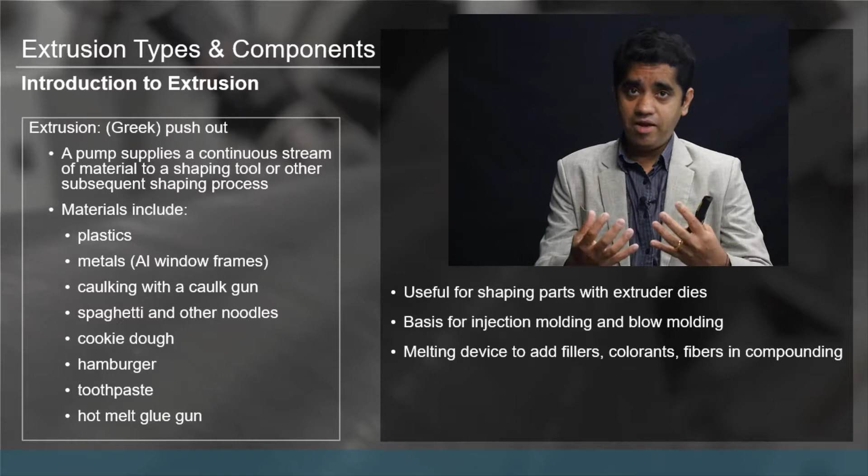So now you're going to see a video which shows you the different components of the extrusion, as well as how the material gets into the molten state, how it's actually mixed, and then how it comes out of the die orifice to get into a shape, and how we cool it to further take the product out of it.

As you have seen in the video, the principle is very simple. Continuously shaping a fluid polymer or molten polymer through an orifice, called a die, and then solidifying that into a product.

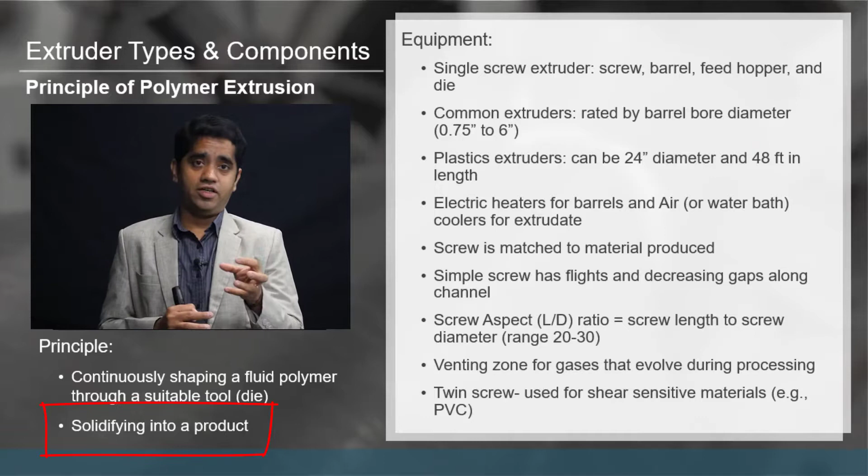The solidification process can be done using multiple different ways. What you have seen in the video is more a water bath system. That's basically a polymeric strand that's cooled to make it into pellets, which is what I was talking about previously, from powder to the pellet form.

But this product can be made using multiple different dies to make multiple different products, and we'll see some examples of that today.

Coming to the equipment that we use, primarily this extrusion process is of two types: single screw extrusion and twin screw extrusion, and we'll talk about both the process physics momentarily.

In general, if you take the extruder as such, it has one screw or two screws depending upon which process you select, and it has a barrel, a feed hopper, and a die. These are the prime components of it, and then we'll dissect into each of these in a few minutes.

And then it does have electric heaters that heat the material to get it into a molten state. But that's not all that melts the material. There's something else that's going on, and I'll talk about that as well.

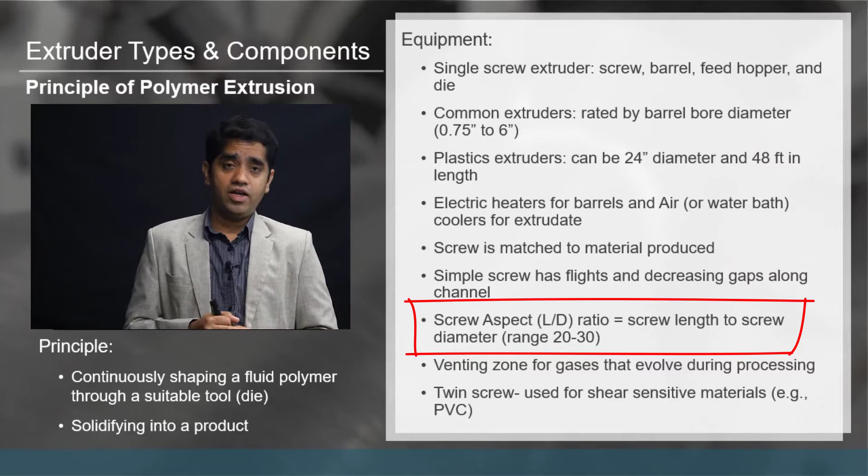Typically we rate these extruders with the diameter of the screw, and we also rate this what we call L by D, or aspect ratio. Typical L by D's range anywhere between 20 to 30, meaning the ratio of length to diameter. So we have a typical diameter which may be 22 millimeters, 24 millimeters, 26 millimeters of the screw.

Again, these are all lab scale I'm talking about. If you go for industrial scale, they are much larger, 48, 96 — pretty huge because the throughput has to be much bigger for industrial scale. And then if that is the diameter, the length can be in feet, so the aspect ratios are pretty large.

Of course, higher the aspect ratios, you'll have more heating zones. But we can categorize all those heating zones into three main zones: feed, transition, and metering. We'll talk about the reasoning of naming these things and what's the function of each and every zone, and how it's going to impact the overall process physics.

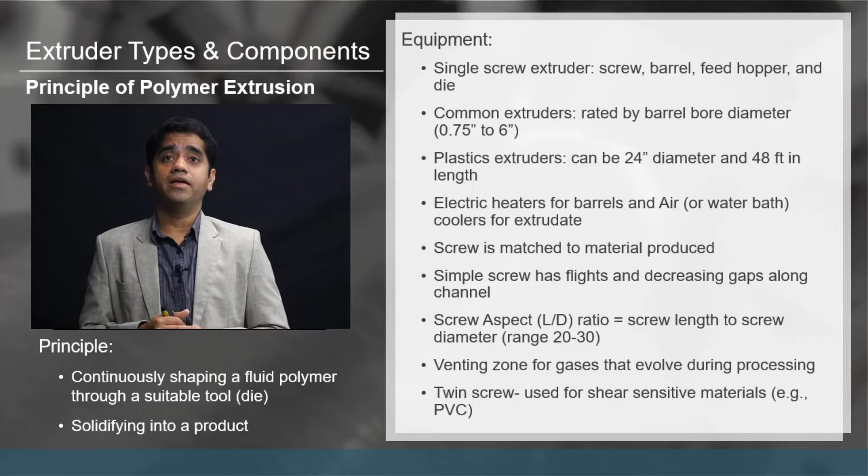Some additional components within the extrusion system, some of which you may see, some of which you may not see.

For example, the drive system. You may not see all of these components individually when you actually go to an extruder, as you have seen even in the video. The motor, the gearbox, the bull gear, and the thrust bearing, all these things are embedded within the drive system.

But the feed system is something you see when you walk through towards an extrusion system. The feed hopper, that's what you have seen in the video as well, and the feed throat, that's where the material gets fed into, and we'll talk about how the material gets into the molten state. And then the screw feed section, and then the screw barrel and the heater systems is something you can visibly see on the machine. And the head and die assembly, that's also as you've seen in the video itself.

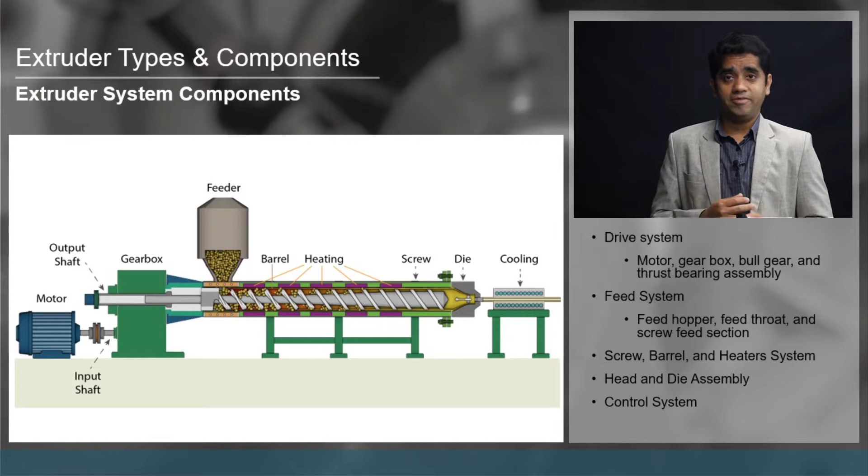The control system is basically the heart of the machine, using which you control the temperatures, the pressures, and everything that's out there. The extruder feeders are of primarily two types, volumetric as well as gravimetric. The one which you have seen in the video is a gravimetric feeder.

But what's the prime difference between these two? A volumetric feeder feeds the material based on volume basis. So it doesn't care about the density of the material. You may have two different materials with different densities, and the densities could be varying by a significant amount. I'm just giving an example here - maybe one has 1 gram per cc, the other has 2 grams per cc. But it doesn't matter what the density is. All that it weighs and controls is the volume, and it just feeds the material from the hopper to the feed section on a volumetric basis, on a volume basis.

On the other hand, the gravimetric feeders do feed the material from the hopper to the barrel on weight basis. Which means that if you have different materials, it exactly weighs the material based on the density and accordingly feeds that into the barrel.

So there's no surprise or question of which one is better, right? Because the answer is very evident. The gravimetric feeders are more accurate and most preferred in an industrial setting. The prime reason being is it measures the weight and then accordingly feeds.

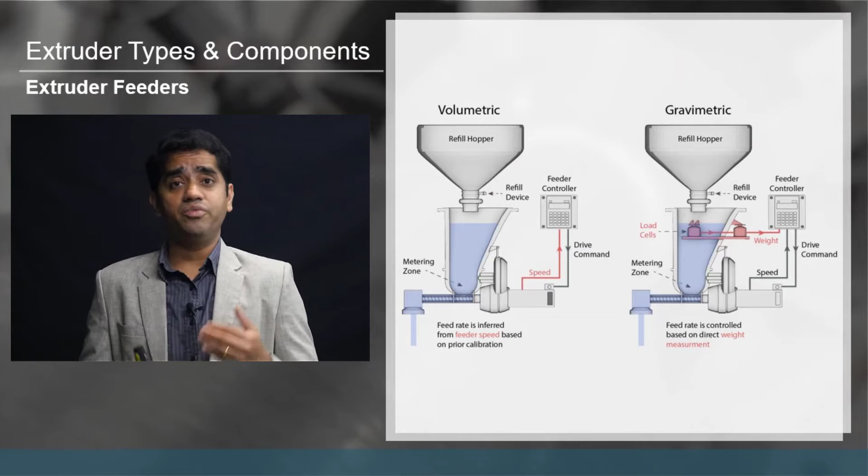This is especially useful when you're making short fiber composites or compounding using a twin screw system, because the materials that you want to blend or compound or make composites out of may have different densities. But if you would like to have a specific proportion, like 30% of one material, 70% of another material based on the weight basis, then that's exactly how the gravimetric feeder will measure and make the assessment and provide the material into the barrel. But on the other hand, volumetric doesn't care about any of the density, so it may not give you the exact weight ratios that you're looking for in the eventual product.

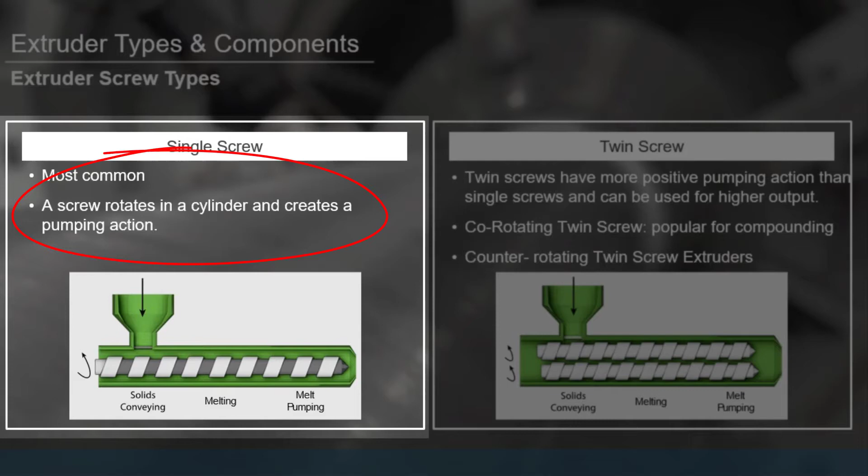As I said, the extruders are of two types. The most common one is the single screw extruder, but the twin screw is also pretty widely used. In a single screw, a screw rotates in a cylinder and creates a pumping action. A single screw is used for a lot of different applications, but it's primarily used for making pellets, especially coming out of a chemical plant.

You get a powder form, and then you have to transform that into a pellet form. So taking it from powder into pellet form, and that pellet form is subsequently used, whether it's in injection molding or even thermoforming or blow molding, whatever other eventual plastics processing technologies there are - you use these pellets especially because of their ability to flow freely. So single screw is primarily used for those, and there are so many other applications as well, but that's one of the most dominant applications, and it's very widely used, most commonly used.

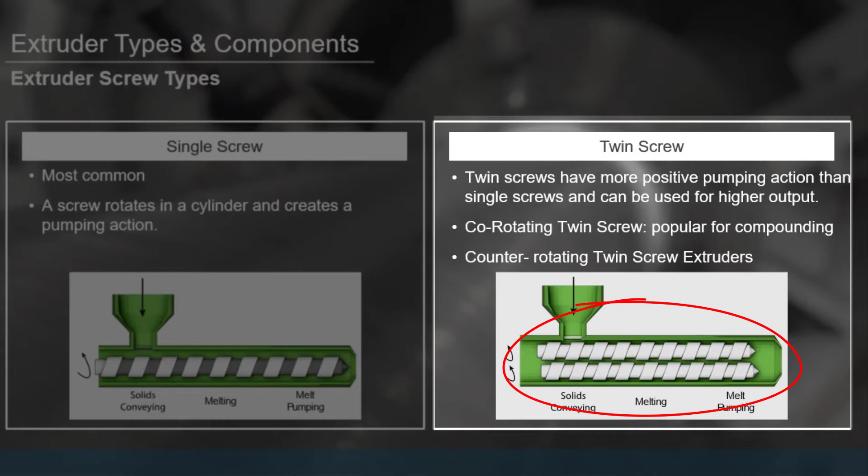On the other hand, in a twin screw extrusion system, as the picture depicts, you can see two screws in there. The prime reason for that is because twin screws are used for compounding. So you have these two screws that enable good mixing of the materials, which you can use both for blending or compounding, as well as making composites. And then the twin screw can be of two types, co-rotating as well as counter-rotating.

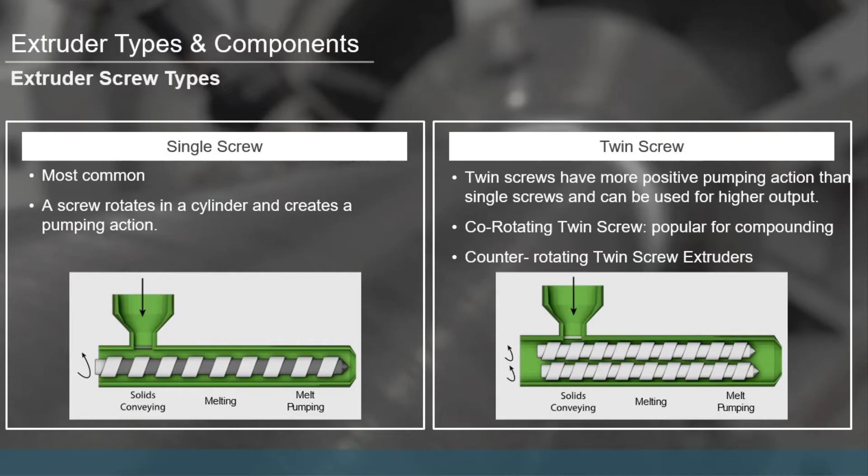Co-rotating is most popular for compounding purposes, while counter-rotating is also used but creates very high shear. It's not used for temperature sensitive materials because it escalates the temperature very fast. So if you have a high molecular weight system, which is difficult to compound, or that can withstand high shear capability or even high temperatures, that's where counter-rotating is used.

The extrusion system, the whole barrel you're seeing in the picture, that's called the barrel, and that's the heart of the machine. As you've seen in the video, the material gets fed into the barrel, goes through multiple transitions within it, and finally comes out of the die to get it into a shape, and then you eventually cool it down to get the product.

This barrel, the prime heart of the machine, is divided into three different zones. The barrel is what we're talking about with the L by D, the length over the diameter. The barrel consists of the screw or screws, and the diameter of the screw is measured in 28, 30, or in industrial scale 48, 96 up to 150 millimeters or even more, with a significant length. So the L over D is basically the aspect ratio we are talking about.

Depending upon the aspect ratio, the larger aspect ratio, you may have more heating zones, so you may have multiple heating zones. However, we can separate this entire system into three main principal zones: the feed section or feed zone, the transition section or transition zone, and the metering section or metering zone.

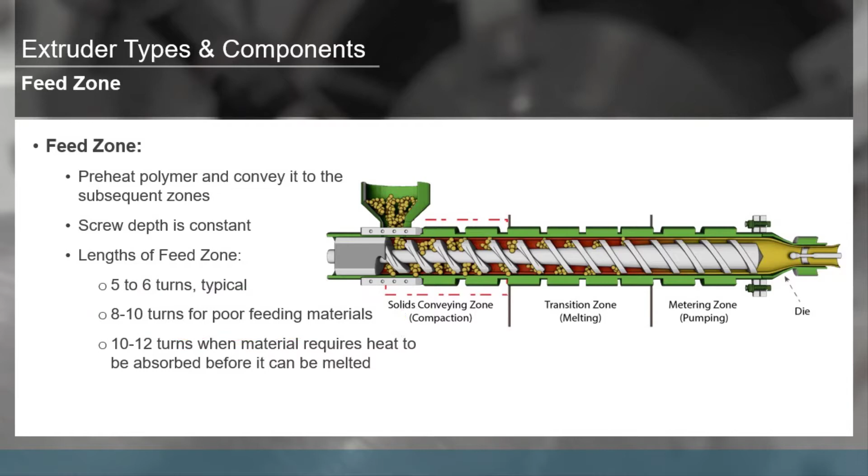So you are completely ensuring that the material does not melt in the feed zone. The length of the feed zone is typically 5 to 6 turns, but it may go up to 8 to 10 for poor feeding materials, or 10 to 12 when materials require heat to absorb before they can be melted.

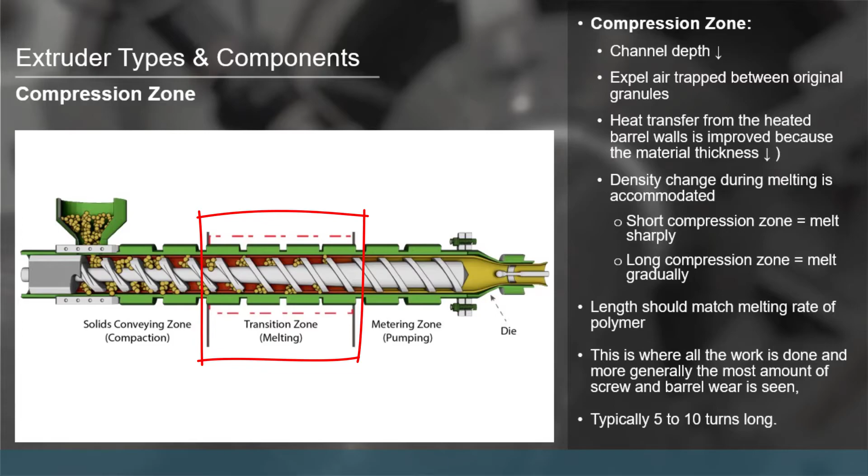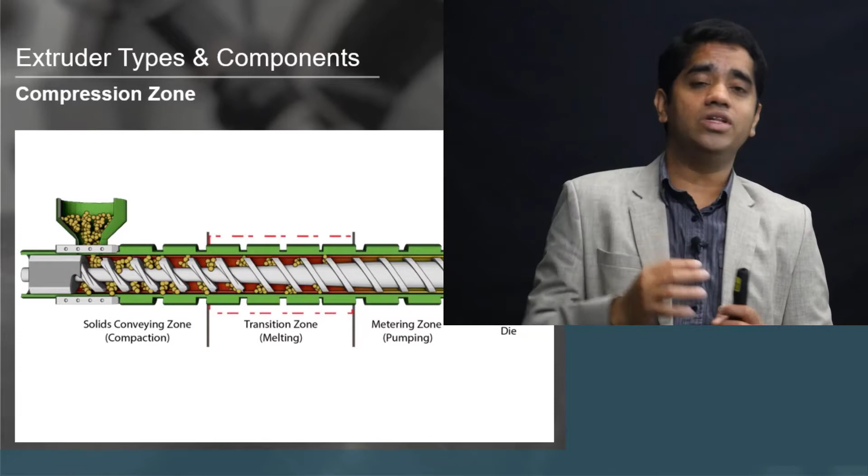The compression or transition zone is the most important zone in the entire extrusion barrel system, primarily because this is where you want to ensure the material completely melts. In the previous zone, you don't want the material to melt, but here you do. The solids from previous zones get conveyed to the transition zone, and here you're trying to melt the material.

The channel depth is decreasing, as you can observe in the picture, and there's a strategic reason for that. By decreasing the channel depth, you increase the shear rate and induce shear-induced heat. That heat, in addition to the external heat provided through the heat bands around the barrel, melts the material. So in this zone, you're actually escalating even the external heating elements.

In the feed section, if the melting or processing temperature is 200, you're subjecting the material to 160 or 170 degrees. Let's say 170. Here, in the transition zone, you set it up to almost 185 or so. So still 15 degrees apart from the actual melting temperature, but the shear heating is so high that you can sometimes even set this up to 190, and the shear heating almost escalates it further.

You want to be careful because you cannot measure the shear heating directly. What you measure on the control system is only the temperature you set on the heating bands, but the shear heating further escalates the actual temperature. If you have a temperature-sensitive material, think about it: the externally applied temperature plus the shear heating will escalate the temperature by a big ramp.

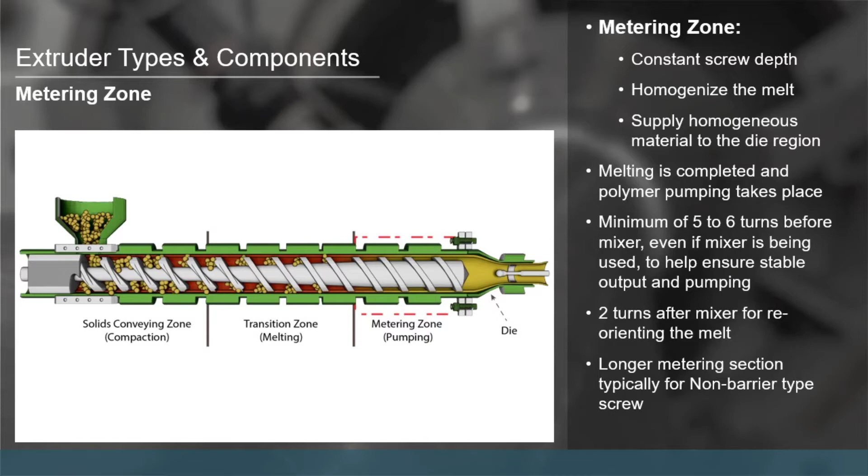That's the whole intent. In this metering zone, you want to maintain whatever molten material comes from the transition zone, so you set the external temperature to the melting temperature range, which is basically 200 in our example. You want to maintain this because the material has already experienced the melt profile in the transition zone, and then pump it out towards the die to make it into product and subsequently cool it.

Coming to the die zone, this is where the molten material coming out of the metering zone is pushed or pumped out of the system to make it into a product shape and then subsequently cooled to get the product out. The two prime components here are, first, the breaker plate, and then the screen pack.

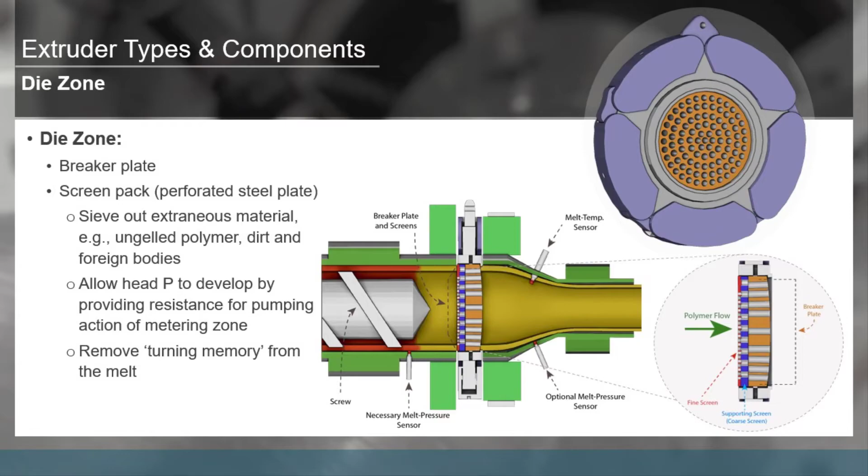The screen pack is primarily made out of a perforated steel plate. It sieves out extraneous material, such as any ungelled polymer, dirt, or foreign bodies. It also helps remove turning memory from the melt, and allows head pressure to be developed by providing resistance for the pumping action of the metering zone. That way you have a high pressure zone and a low pressure zone outside, so there's a transition of material from high pressure to low pressure.

But there is also a problem when you are making composites - the screen pack can increase the pressure to such a high extent because of clogging with the fibers that it may actually stop the overall action of the system. So you have to be careful when processing composites or high viscous materials. That's when you have to take extra care in terms of the screen pack design, or you may have to sometimes even remove the screen pack to make sure the material flows through smoothly out of the die and then subsequently into the product phase.

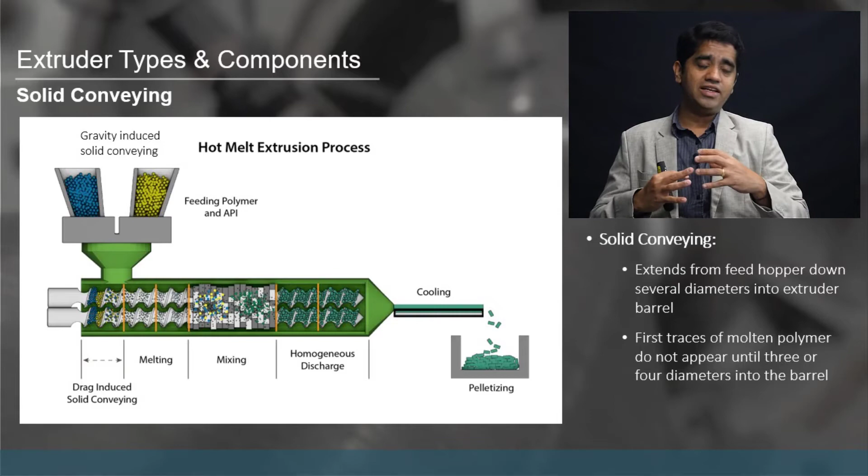Now let's look at solid conveying. So basically we talked about the transition zone where the material gets into the molten state. From the feed zone, the solids are being conveyed and then get into the transition zone, and here the material starts to melt. Solids conveying is all about conveying the solids from the feed zone towards the transition zone, and within the transition zone, how the material molten phase occurs.

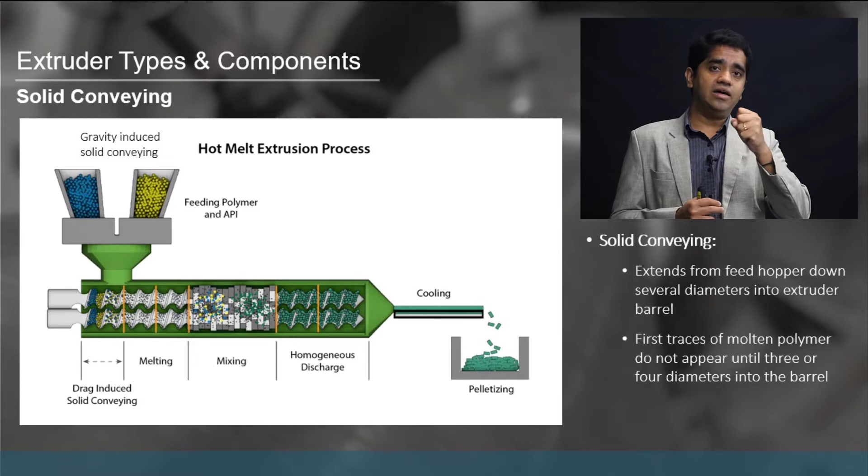We can explain this using the plasticizing Tadmor model. As you can see in the picture, there is a rotary action around the system, and those are the two flight channels, between which you have the material. There are solid beds which just came out of the feed zone, and they keep on rotating, and form a thin layer of molten film. This is due to the external temperatures that you have set, let's say 180 or 185, and that thin layer gets into the solid bed again, and then the rotation continues to happen.

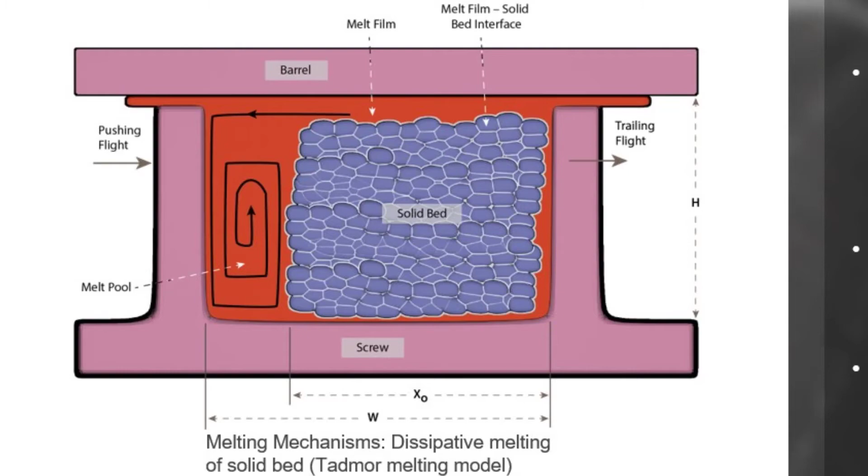When more and more material from the solid bed gets melted, it goes towards the melt pool, and that's how the melt pool develops, and subsequently you have a complete molten material which is then pumped into the metering zone. This is nicely explained by the plasticizing Tadmor model, and this is a phenomena that actually happens within the barrel of the extruder between the two channel depths that you can see over here.

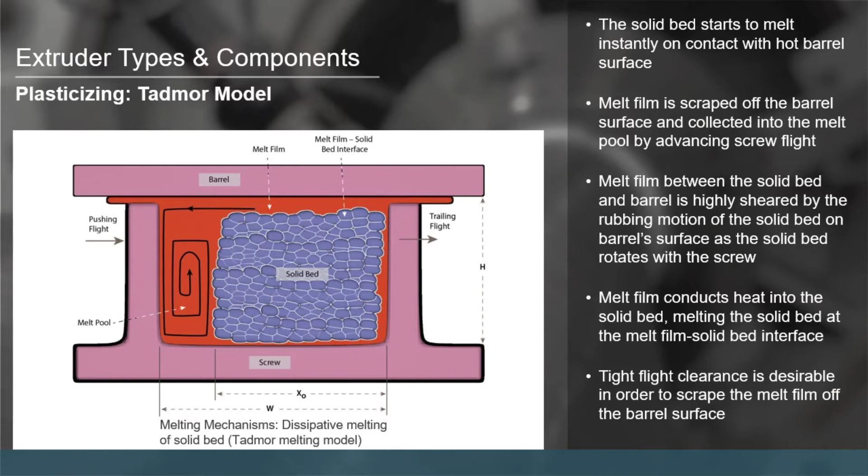Some of the preferred conditions for a high dissipative melt capacity of a screw at a given screw speed could be high barrel temperature or smaller channel widths. That also could help in expediting this whole system, and very tight flight clearances, because all of these will increase the shear heating that eventually will help to melt the solid beds more profoundly and much faster, so that the melt pool can be generated at a faster rate.

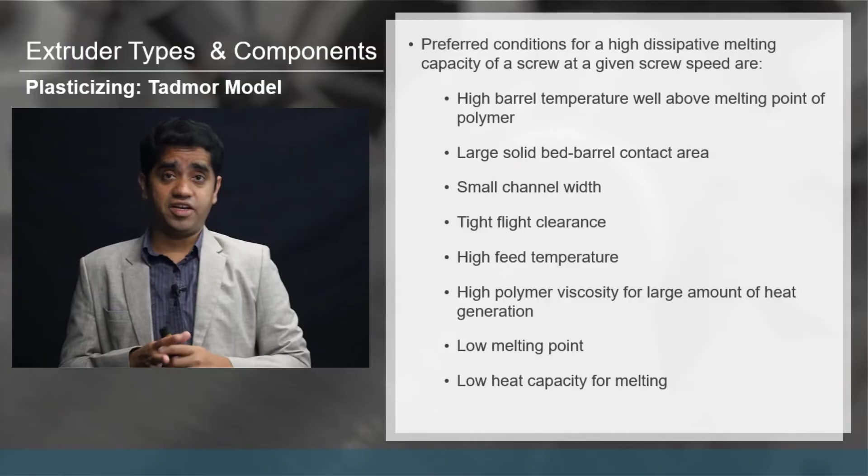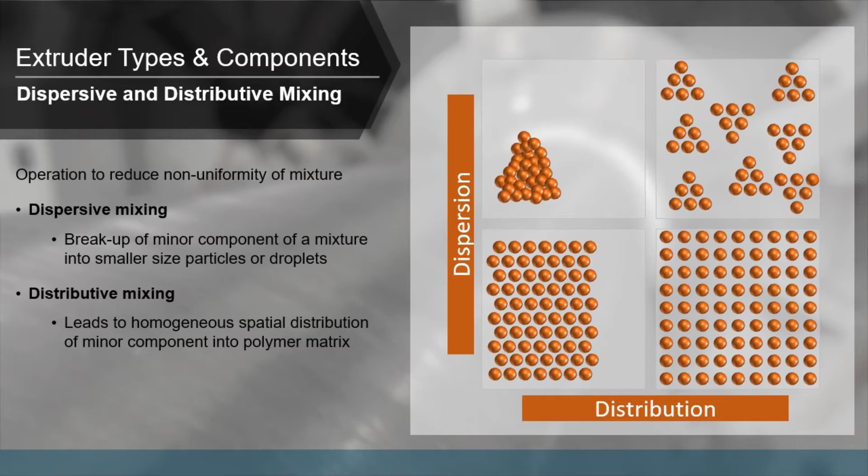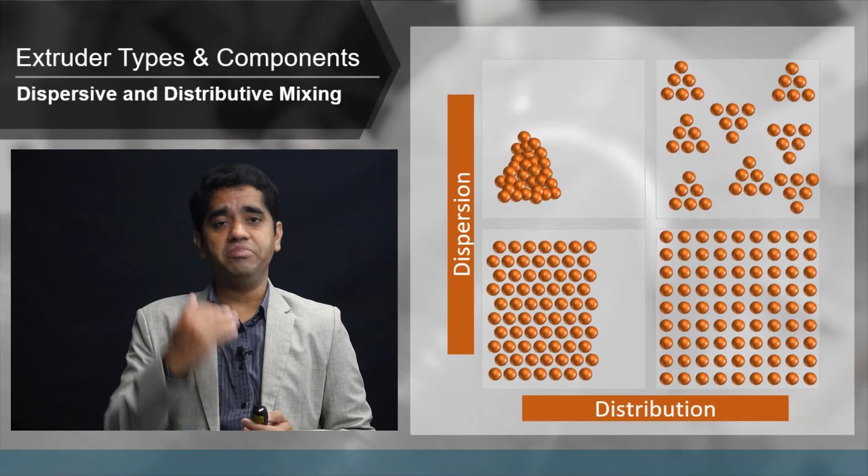In terms of distributive mixing, you can have the same clustered agglomerate particles, and then you can have a lot of them in small bunches, or you can also have a dispersive mixing done, and then those get distributed. There are some kind of mixing elements that also facilitate distributive mixing. Ideally, what you want is both dispersive mixing as well as distributive mixing. If you look at the four quadrants shown, the last quadrant is basically what we are talking about, on the right hand side, which is dispersive mixing as well as distributive mixing. Ideally, that is the type of mixing you want. So your screw design should be a combination of these two, so that you can realize the eventual dispersive plus distributive mixing in your final material, and that will help you get the best property material system, which eventually makes it into a product.

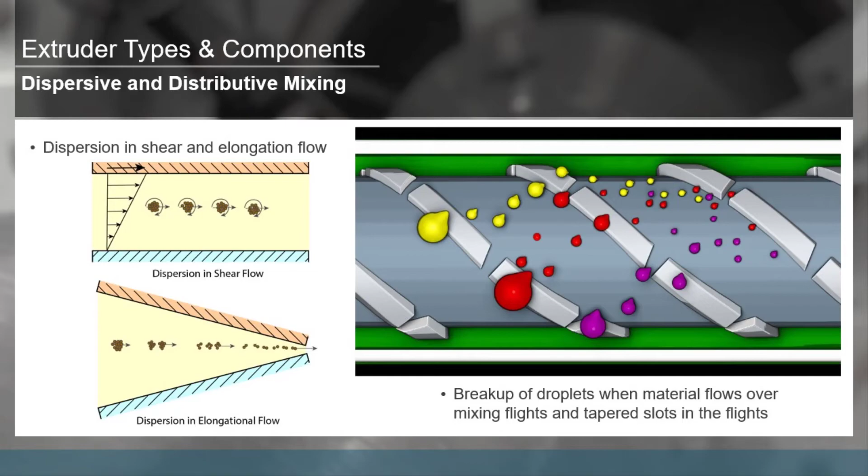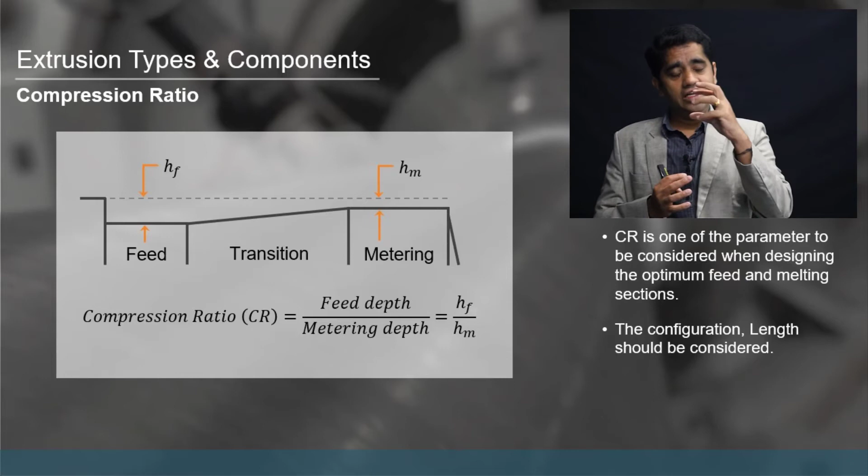Another important parameter to keep in mind is the compression ratio, defined as feed depth over metering depth. If you remember the anatomy of the screw, the screw diameter doesn't change in the feed section. It narrows down in the compression or transition zone, and then remains constant again in the metering zone. So the depth in the feed section to the depth in the metering section is what we're talking about as the compression ratio.

This is a very important factor that determines how fast and how the heat transfer is propagated to the material, how fast the material gets into the molten phase, how fast your throughput is, and how it impacts the properties of your materials. That's why for every well-known material system, whether it's polystyrene, polyolefins, polyesters, or any kind of thermoplastic, there are predefined compression ratios that are set.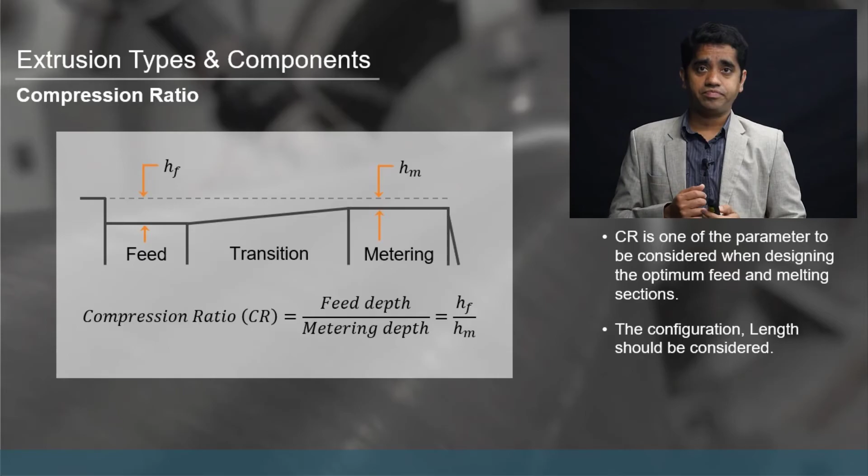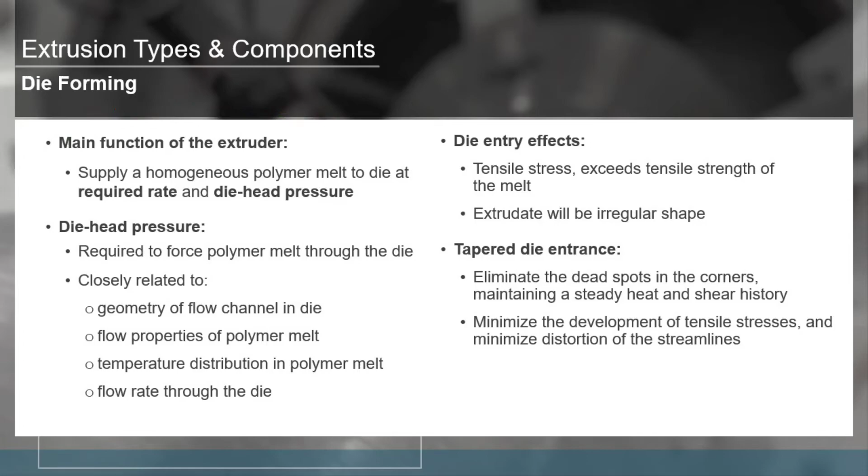So these are the two considerations: the extruder supplies the polymer melt at a certain rate, which we call the throughput, and at a certain die head pressure, so that the pressure propagates and pushes the material out towards a cooling system or a subsequent accessory system that cools the product.

There are two other aspects to consider: the melt quality and stability. Melt quality is defined as the quality of the melt that's flown into the extruder through the die and gets into the product. The stability is actually more important because it will ensure there is a consistent yield and product coming out of the extrusion system.

When you talk about melt quality, there's another terminology to distinguish, which is melt quantity. Melt quantity is the output rate or throughput rate, how much material is coming out, and extruders are actually rated by this. There could be extruders with 4 pounds per hour, or 20 pounds per hour, 4 kilograms, 400 pounds, 200 pounds. So the throughput changes very drastically depending on whether you're using a lab scale extruder versus an industrial scale. In an industrial scale extruder, obviously the throughputs have to be much higher to meet the production demands.

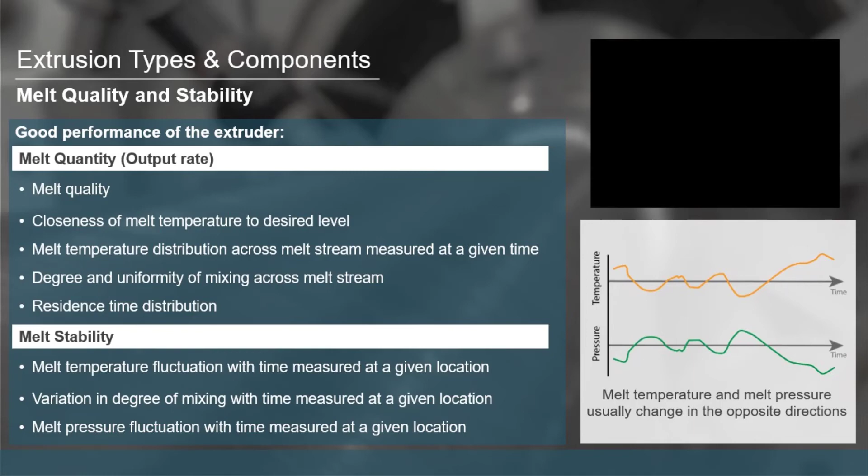That will change your product properties too, because you have designed a part based on certain properties, and those properties are designed based on a 40-60 ratio of two material mixture. But if your melt mixing is not uniform within the barrel, you may end up with 30-70, which may change the material properties and eventually even impact your entire product design.

The next thing is residence time distribution. Residence time is a very interesting factor. If you keep the material within the barrel for a longer time, this is especially more challenging when you have a long L by D, or high aspect ratio extruders, because the material stays inside the extruder for a long time. Now with such a long duration, if the material is temperature sensitive, you may see degradation of the polymer.

So how can you overcome this? You can pump out the material way too fast, meaning you rotate the extrusion screw at a very high speed. What's the disadvantage of that? By rotating the screw at a very high speed, you're having a lot of shear heating, which may escalate the overall temperature of the melt system and disrupt the overall quality of the melt.

So you have to be careful in the selection of the extruder for your material system. You don't use the same extrusion system for a host of different materials. That's why when you first go to buy an extrusion system, the first question the salesperson asks is what materials are you trying to extrude. Depending upon that, he will give you normal specifications of the L by D, which is the aspect ratio, the screw diameter, the screw design, and all those things.

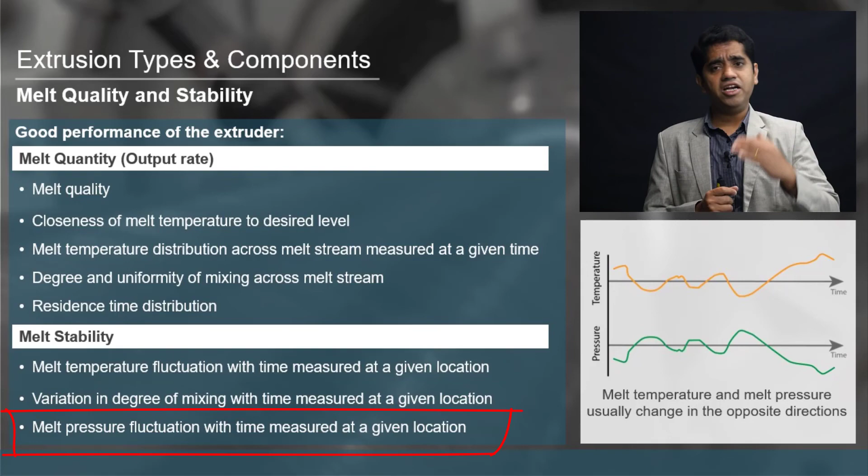Why does this happen? The melt pressure gets fluctuated due to multiple reasons. If there are contaminants, that may change the viscosity, and that may even create some slippage within the material system that may vary the pressure of the melt. So these are all the different things that may impact the overall melt quality and quantity because of the throughput, as well as the melt stability. If you can control all of these things, your eventual product performance will be much better.

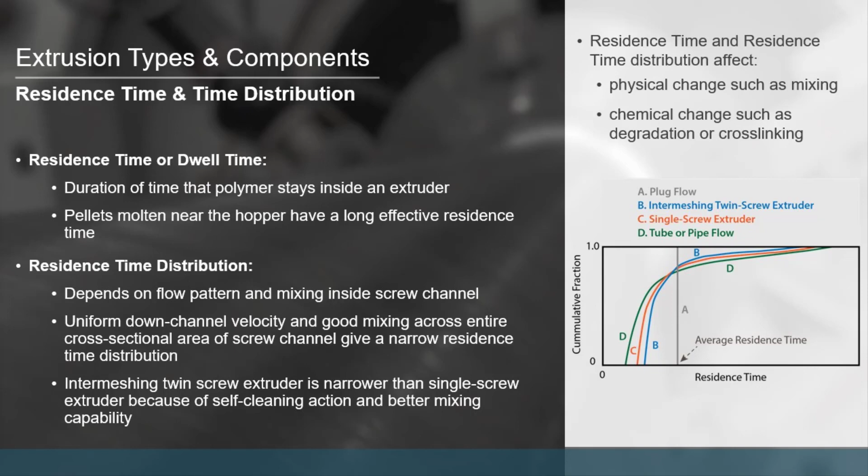Residence time or dwell time, as we talked about, will significantly impact especially temperature sensitive materials, so care should be taken in dealing with such materials. One example is bio-based plastics, polylactic acid. If you are dealing with this kind of material system, it has a very narrow processing range, meaning you can process it between 185 to 195.

For polylactic acid, it's actually 180 to 190. In fact, 160, or 167, is its melting temperature, so up to 180 is fine. Anywhere between 160 to 180 is basically what you're looking for, and that's a very narrow processing range. If you have an extruder with, let's say, 30 L by D, meaning it's pretty long, you have to set everything at 5 to 7 degree increments, which is tough to maintain. Also, the shear heating goes up pretty fast, so it's very difficult to maintain within such a small temperature range. On the other side, polypropylene can be processed anywhere from 165 degrees all the way to 220 without any degradation.

That's basically the processing window we're looking for, which is most important. So a lot of work is being done to extend the processing window, and there are many other things I'll talk about eventually later.